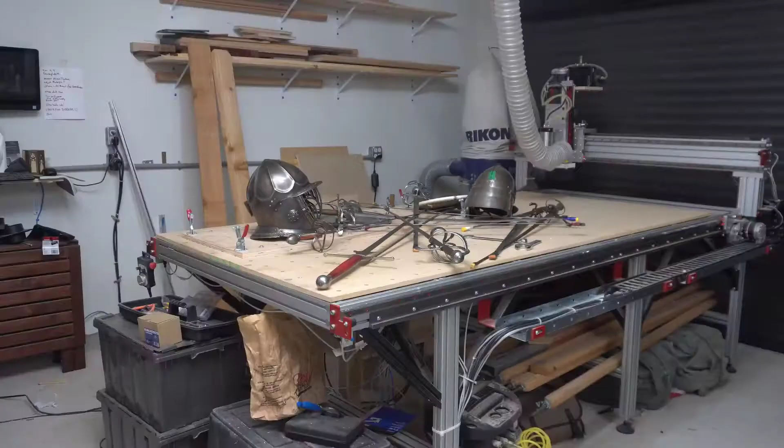Okay. Swords are not supposed to be in a CNC machine. So I guess we're making a sword rack.

We're going to try something new today on Hands on CNC. I'm going to give you guys an agenda with time codes, so feel free to jump to the part you're interested in. That being said, we're also going to cover kind of the whole workflow from idea to thing. So if you're new to CNC machines and digital fabrication, watch the whole video. If you have friends that are new and you're trying to explain things, great intro video of this is what CNCs do.

So we're going to cover, obviously, the design itself in Fusion 360. We're going to jump into Fusion 360's CAM area. We'll talk about how we made the cut operation choices we made. Then we're going to do the construction. You can watch some construction videos. It's ubiquitous. They have to be construction videos. And then we'll kind of review the results and talk over what we learned.

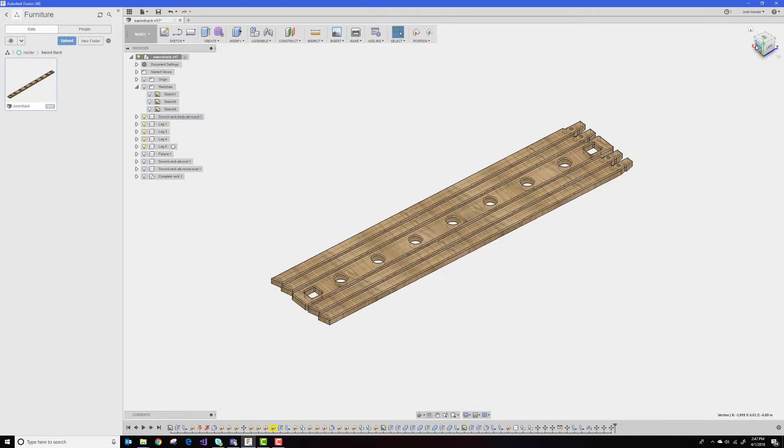All right, so here's our sword rack, kind of starting from the end design-wise, because I've already made these. I make these, so backwards maybe. But the reason we use a CNC to make this, it looks like a very simple part. It really is a simple part. There is some interesting geometry up here. This geometry is a little interesting, and it would be a little difficult to do by hand. Not impossible, but that's what robots are great at.

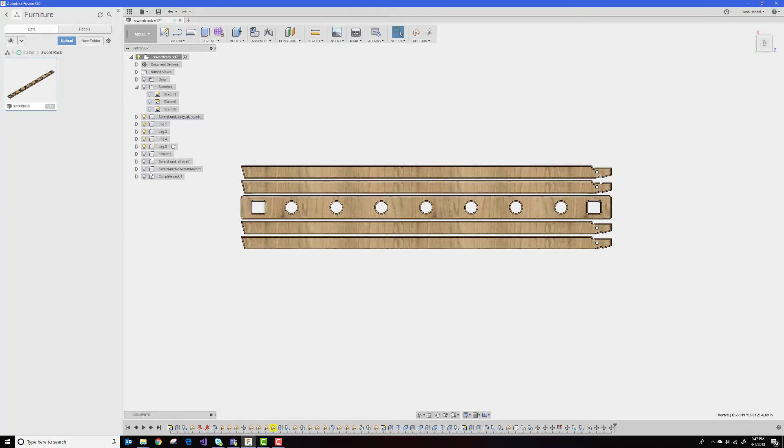So what CNC machines are great at is doing a little bit of complicated geometry and then making it absolutely consistent. So there's some geometry up here that allows you to lock the legs around the leg holes, kind of like a vise. I'm going to show you what that looks like in a second. And then there's matching geometry at the bottom, so when the legs are open, they're flat. And so the idea is you take two legs, you flip one backwards to the other. So you really only have two parts to this whole thing. You have the body and you have the leg.

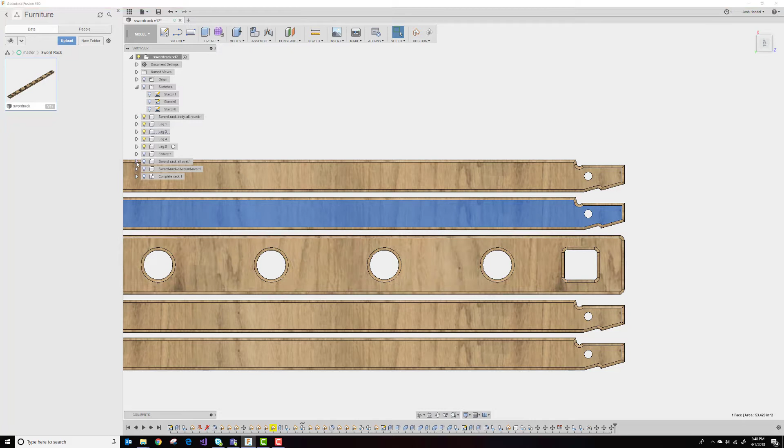Now, I have a couple versions of the body. I happen to. You don't have to have. It's just my own thing that I have a couple versions of bodies, an all oval. There's an all circle, and then I have a circle oval. But the legs don't change. It's a nice thing. It's one leg design. Get the math right, and then it works out.

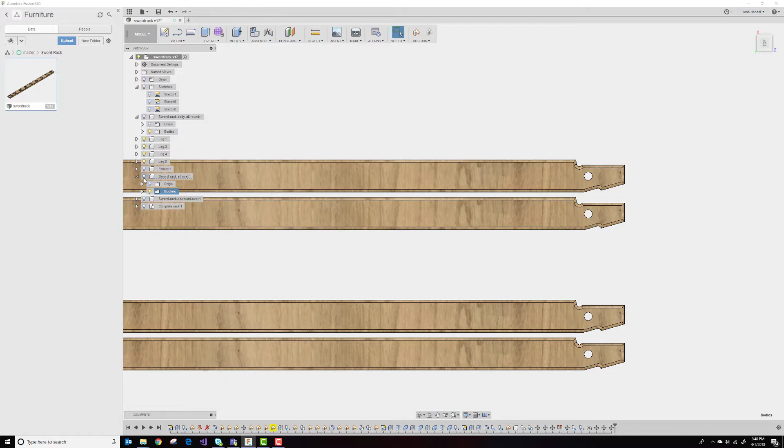So when I say get the math right, what does that look like? Well, I kind of put together a little operating example here so we can talk about that. So let's go back to home. Let's flip around to where my sample is. And so you can change our view a little bit, maybe make this a little more visible. There we go. So you can kind of see this leg fits through here and then clamps.

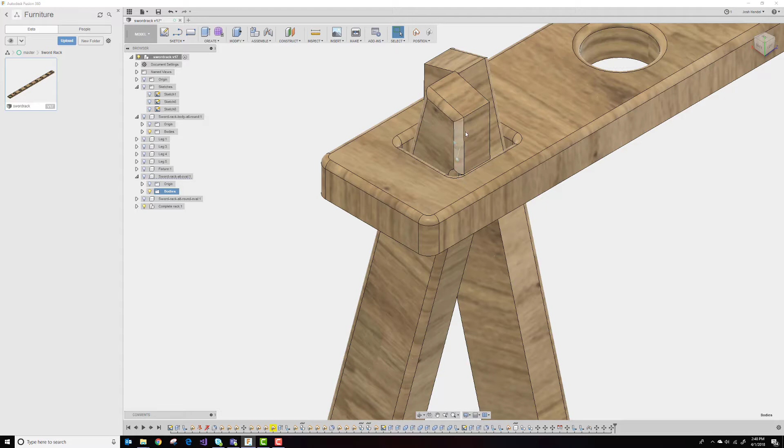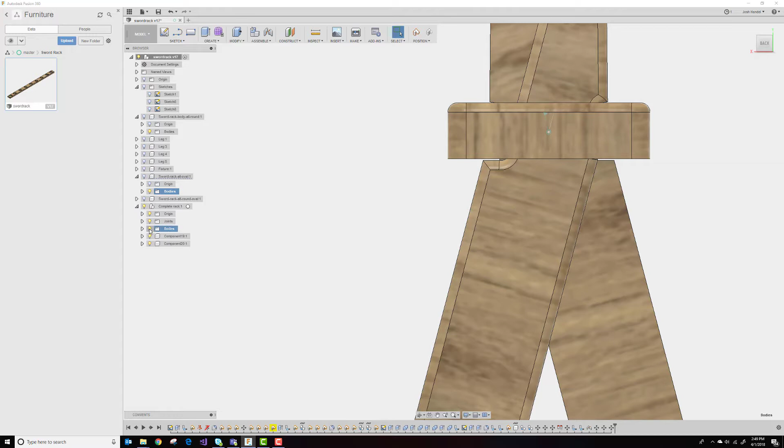And if we go to this view here, you can kind of get an idea how the leg goes through, and it opens up, and there's a little ledge at the bottom, and then that little radius comes over. And if I hide the body, you can see what we essentially get are like little pairs of pliers squishing down and holding the sword rack itself in place. So we give the sword rack a ledge to sit on, and then we give it a little squeeze to push it down into that ledge.

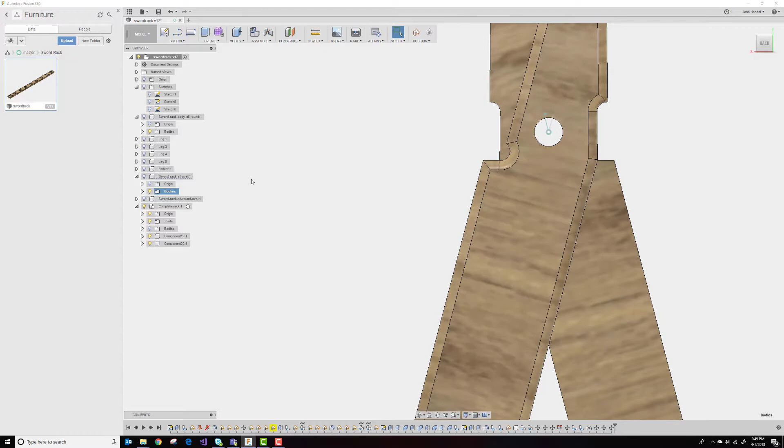And the more this leg pushes down onto this leg's ledge, the more this leg pivots and pushes down in reverse. So you get a clamping action. It's there and it's clamping. And if we operate this joint or drive it, when it's closed up, it's a nice simple piece of material. It's actually bigger down here. It's bigger than the hole.

So it'll slide through, and as it slides through, it'll actually start to force this open, and then it'll clamp in place. It'll get to a point where it can't go any further. It'll clamp into place, and it'll actually kind of firm up and be a nice rigid support. So that's a little bit of fiddly geometry that we did. So the sword rack originated from one friend showed another friend.

So shout out to, in the SCA, Master Aaron Harper, who came up with the first design of these, and then Master Yago, who came up with his version, and then I kind of took his version. I have a CNC machine. I can do this because he did some very simple tooling, a very easy one. But there were some challenges to hand shaping and some other things. It didn't have this clamping geometry. Couldn't quite firm it up.

So if you're in the SCA, you might know who those guys are. If you're not in the SCA, don't worry about it. They're wonderful individuals, and thank you for their evolution of this to the point we're at. So there we have it. Let's talk about how we got here.

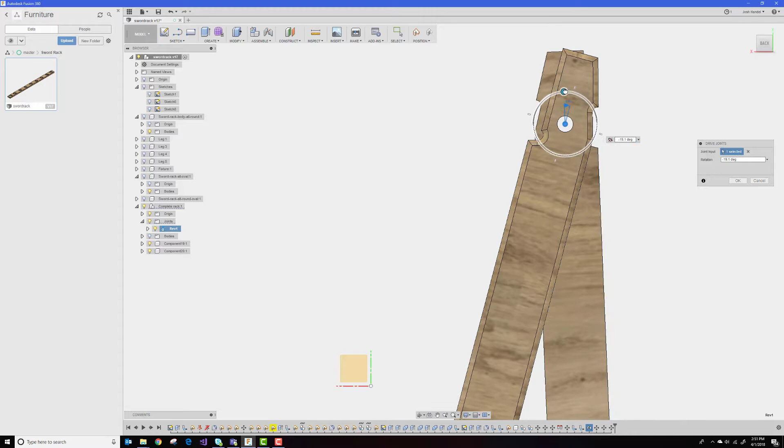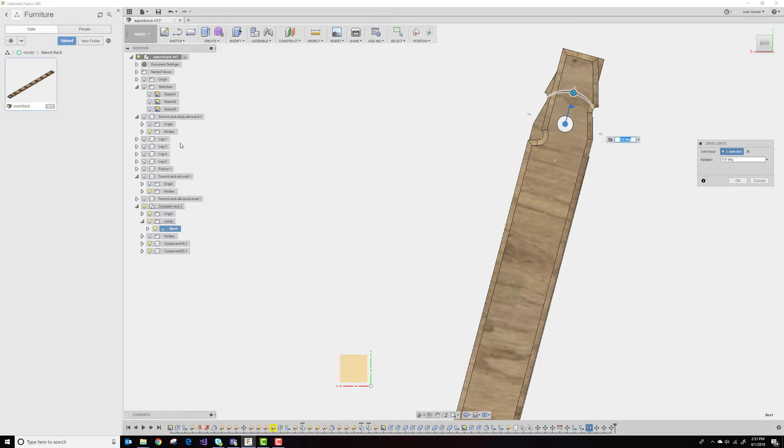If you're new to Fusion 360, if you've never heard of Fusion 360, it's a 3D CAD CAM software, so 3D design and computer-aided machining, so basically instructions. We're going to cover that in a second. Go download it if you haven't. It's not free. It's free for students and hobbyists, and then if you make enough money, you do need to pay for it, although the price is not that bad. So when we work on something like this, we actually work on it first with sketches. And so we're going to look at those sketches real quick.

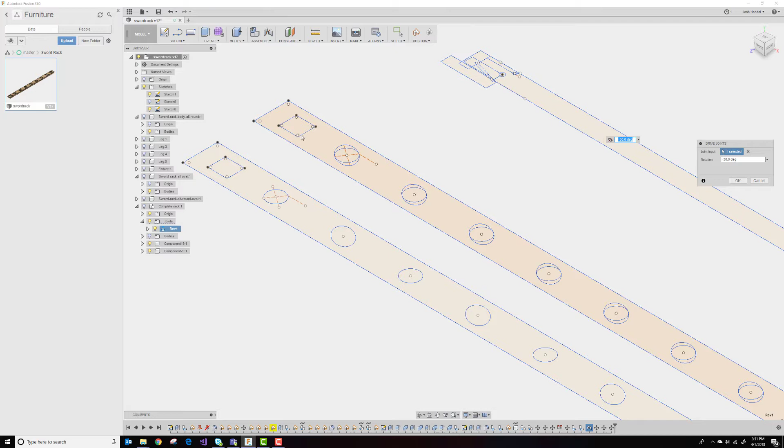So the base is very simple, right? It's a rectangle based on the size of material we want. Some holes in that. This hole is a specific size to match up to what's going on over here, which is the leg. And we just tell Fusion 360 to extrude. So you can imagine, if this was our template, we're just pulling that template into three-dimensional space, and we can make a body out of this.

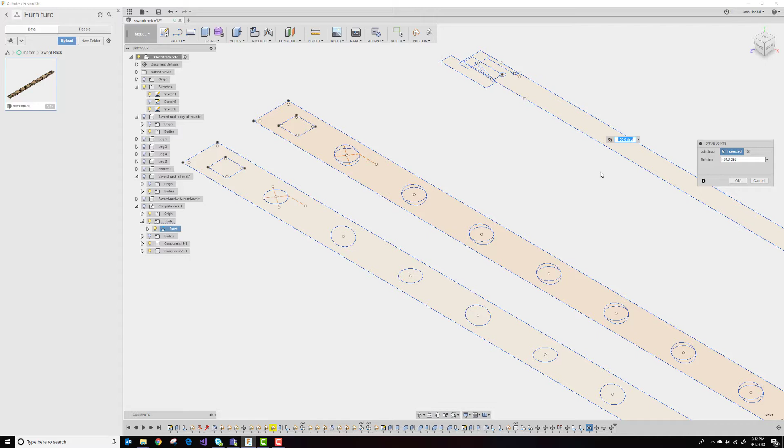In our case, we tell it to be 3/4 of an inch thick. Or if you're unlike the rest of the world and use proper SI units, it's times that by 25.4. Let's rotate that. There we go. All right. So there's your body.

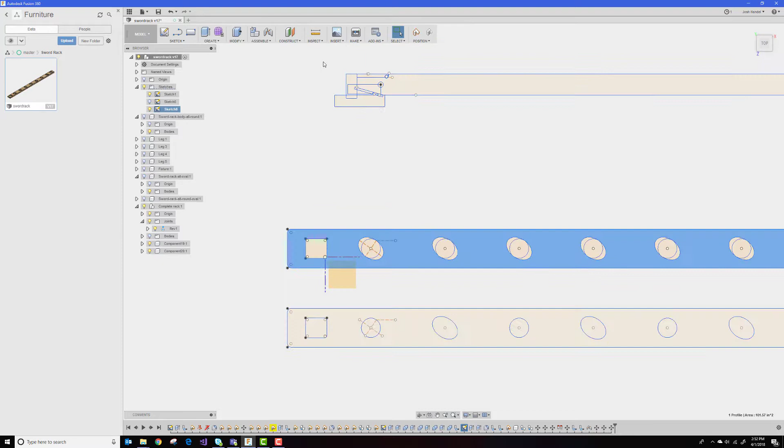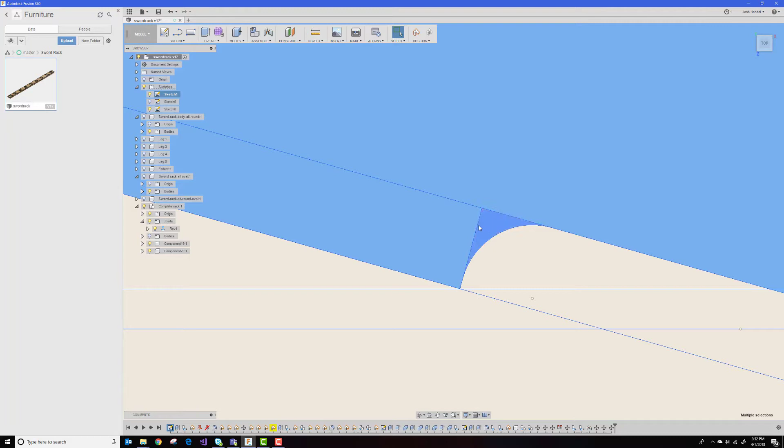Now this fiddly bit over here, all of this makes the foot. Obviously, the part at the bottom makes sense, right? There's that angle. But what's going on up here is we're making a series of subdivisions to allow us to select just the part that we want to be the foot. We wanted this to be a 30-degree angle, so that's 15. So 15 plus 15 because there's two legs gives us 30.

Then we want this line to work with this line, so these are perpendicular here. This line is perpendicular to this line. We have a certain distance we want this to be from this, so our material's 3/4 of an inch thick. So this needs to be a little more than 3/4 of an inch. There's that top radius, that 1/8 inch radius, because we're going to use an 1/8 inch bit to round over the top. So we actually want this to curve and fit. A little bit of extra material to come over that ledge.

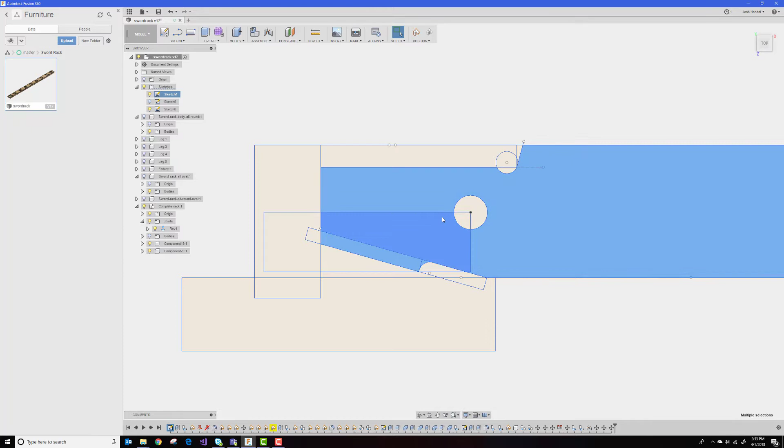And then we want this whole thing to be smaller when it's folded up than the hole that we're going into, which is obviously wider than the space. And so that's to make that narrowing shape. So this is some basic, fiddly work. But once you've done that and you're happy with it, you just extrude it like the body. So very, very simple model to make. And that covers the model. It really is just that easy.

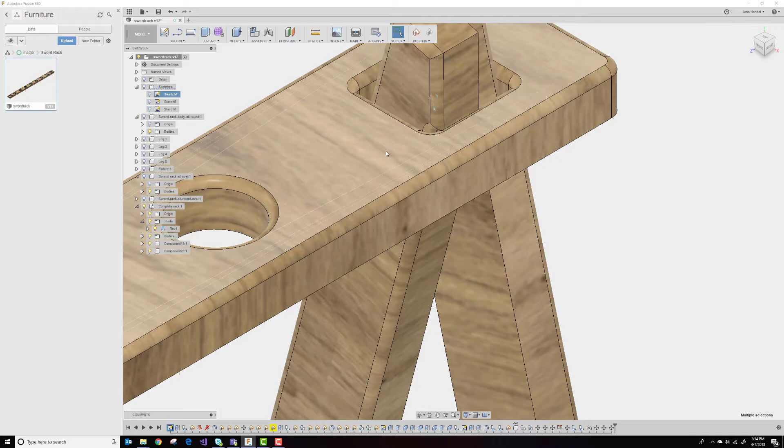And then you get a shape like this, and you put the body on it. You can see again, here's that wrap we're talking about, right? So there it is fitting in and around and clamping down. So once I'm happy with my model, I'm going to make my cutting layout essentially. I'm going to take all my parts and lay them out in a way that I cut them out.

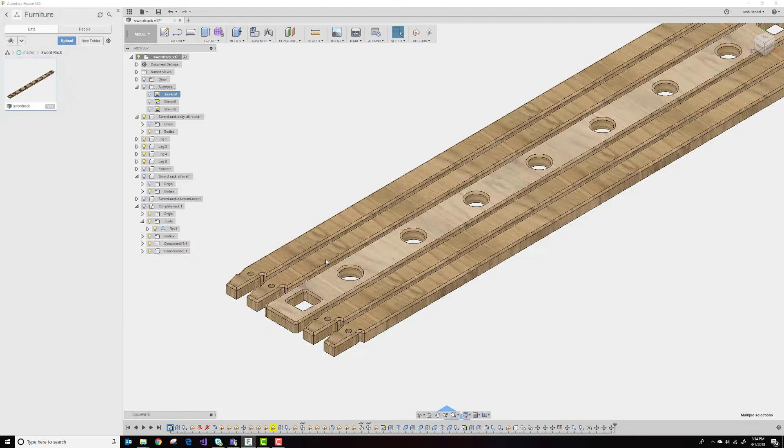This is an interesting thing you have to think about: you have tools, or bits, that you're going to have moving around. So how do you space things to cut? Obviously, if I put these exactly next to each other, what's going to go in between them to do cutting? In this case, it's pretty straightforward. I put a 1/4 inch between all these parts because I'm using a 1/4 inch bit, so one bit can cut both sides. And then I have a special radiusing bit that I'll use to cut the soft turns. All that we're going to cover in CAM, so let's jump over to CAM.

All right, so here we're on the CAM. CAM, computer-aided machining. So if you're new to this, this is how you tell the CNC machine, essentially the robot, exactly what to do. So we're going to tell it, I want you to take a specific bit, which I'm going to load in it because I don't have an automatic tool changer, and I want you to follow a given path. I want the RPM of the router to be a certain speed, and I want you to go through that path at a certain speed.

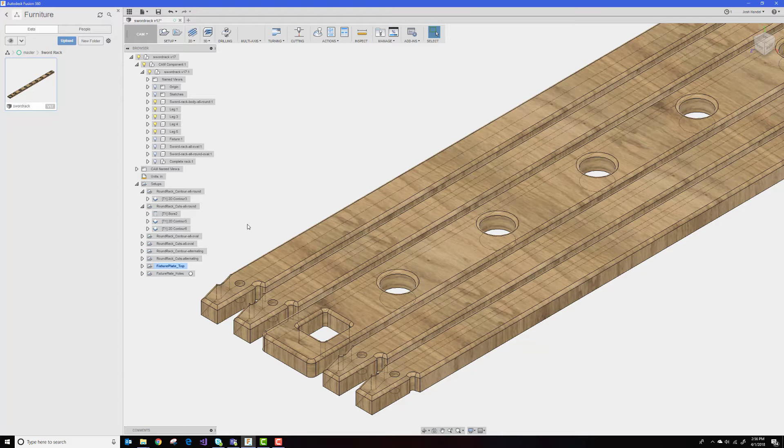So that's called your feed. So oftentimes you hear in CNC world, feeds and speeds. Feeds, how fast is the machine moving through the material? Speeds, how fast is the spindle spinning the bit, which we call the tool. So tool's a bit. Feeds are how fast it moves. Speeds is what's your RPM.

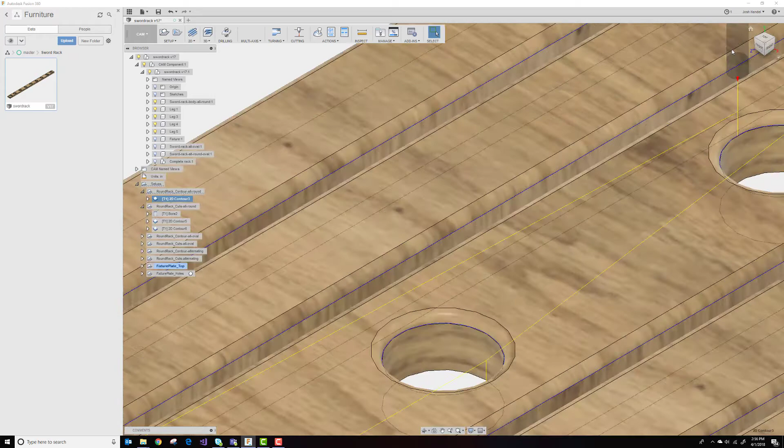In this project, they are very simple. We are radiusing this part, so we're telling it to take the center point of the bit and follow some lines, and we're telling it to follow those lines an eighth of an inch deep, and it's a special bit. You can see here that it's modeled that bit as an eighth inch radiusing bit. So that's a very simple job.

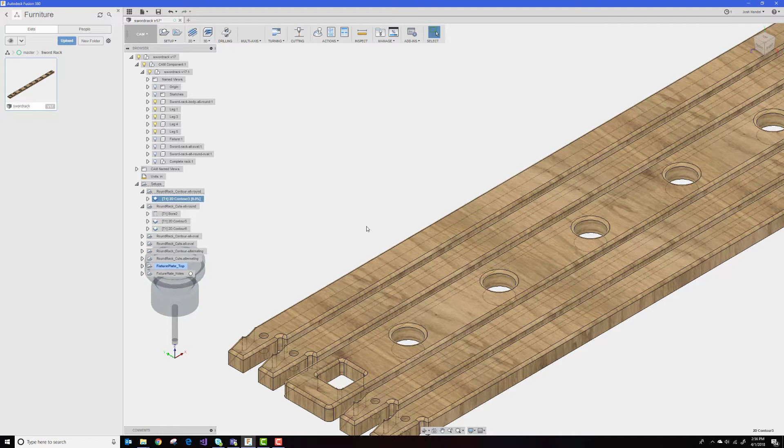If we go edit this and look, it really is a special bit which we've told Fusion 360 about. We want it to run at 20,000 RPM, and we want it to move a fairly slow 52 inches a minute, because it's a fragile, very small bit. It's literally going to a point. And we cut a lot of different materials, so it's kind of a safest path, right? We could be really efficient, but...

So once we've radiused it, then we want to cut out all of our parts. So first step is we're going to do what's called a boring operation. It's a helixing operation. So very first step is we change our bit. You can notice the bit shape changes. And if we look here, we've actually changed our bit to a 1/4 inch bit. Now notice it's not actually a 1/4 inch bit. We've measured the bit, and while we thought we bought a 1/4 inch bit, we actually bought a bit that was a few thousandths smaller.

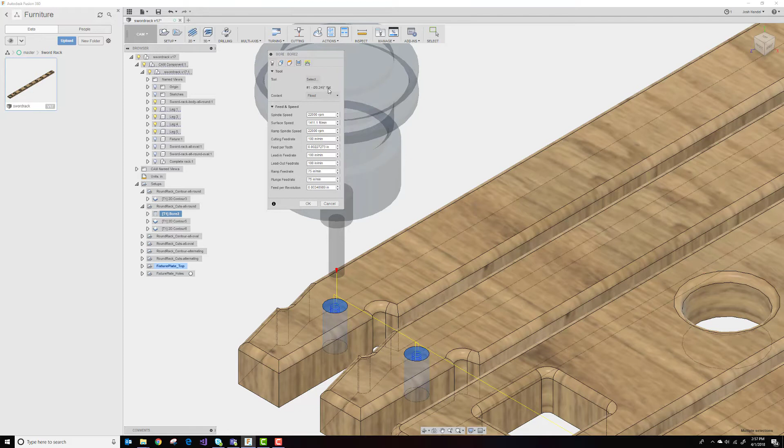And this is important because if I am a few thousandths off, I'm essentially a 100th smaller on all insides and a 100th bigger on all outsides, because if I cut this circle, the CNC machine is going to assume I have a certain thickness of bit. If I tell it it's a 0.25 thickness bit, it's going to move to cut 0.25. It's going to move the bit slightly to the inside because it thinks it's a bigger radius.

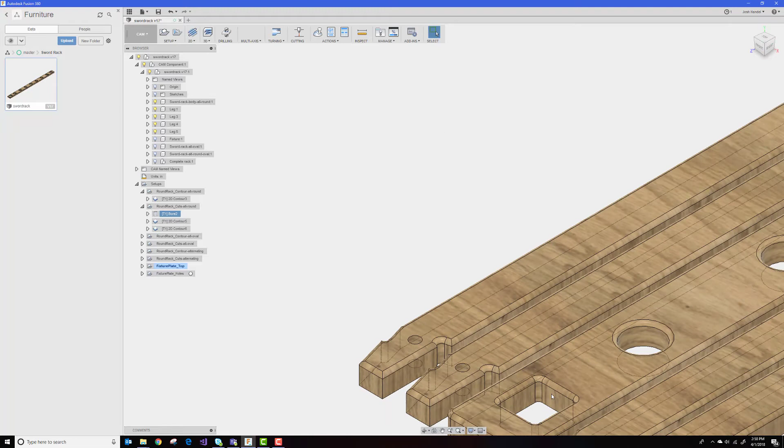So what happens is all of these circles become a 100th of an inch smaller. We're talking about 5 thousandths of an inch difference. It turns into a 100th because you have the problem on both sides, essentially radius, right? So all of our holes become a 100th of an inch smaller than we thought. Now that doesn't make a big difference in these big holes, but in these bores it makes a big difference, and it makes a big difference in these holes.

Now why does it make a difference in these holes? There should be a 100th of an inch grace area. Well, these are a 100th of an inch off, too small. The outside corner has the same problem. The bit's moved slightly, so now the outside is a 100th of an inch too big. The result is the whole part is 2 hundredths of an inch too big.

So we want to know exactly what bit we're using. We want the CNC to know exactly what bit we're using. We're going to save ourselves a ton of time in sanding and fitting parts together. And we're still going to sand and fit parts together, but we're going to save a lot of time. It's not going to be as bad.

So we do the boring operation. Then we do a contour to cut out the insides, and you'll notice there's a little notch here, and we'll do a simulation to show what that is. That's called a tab to keep the part in there. If we cut that out, the remainder stock is going to fly out of it, could cause damage, could get stuck. We don't want to risk that, so we want to keep all the parts. We don't want parts to move until we're done with the project, right?

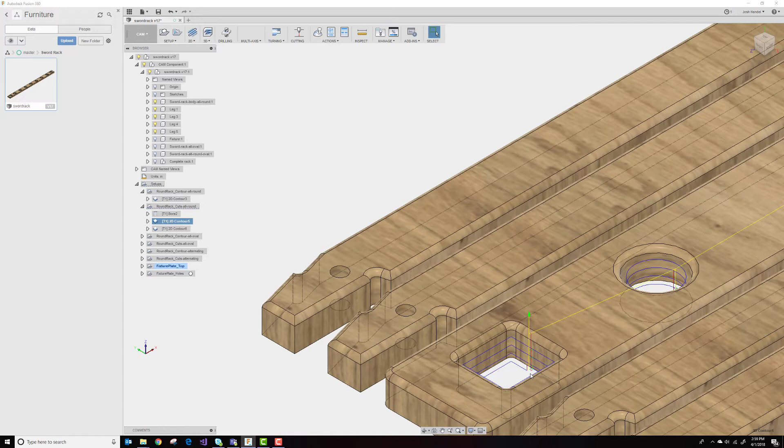And then same thing, we're going to cut to the outside. Now, whenever you do these contours or whatever approach you take to cutting, there's a bunch of different ones here. We're not going to cover them all. There's a lot of different strategies to cutting. In this case, contouring is a very simple one. It's appropriate for a lot of wood projects. We're going to simulate that.

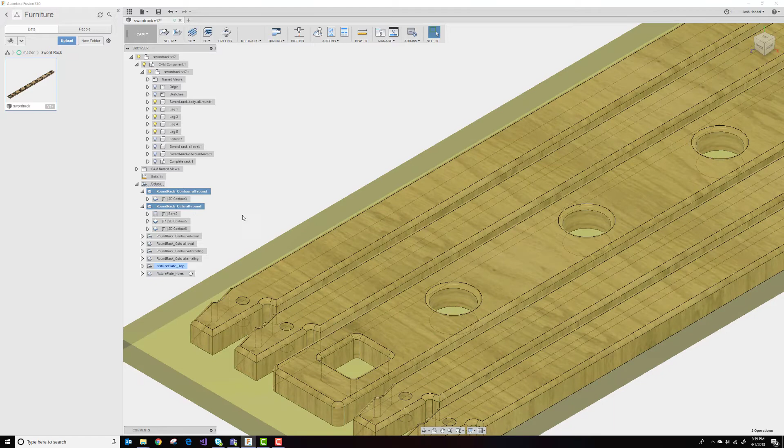So we pick our part, and we go to simulate, and we're going to tell it what we want to simulate, and we're going to hit play, and you can change the speed. I'm going to go real fast, and you can see it's whizzing around, and we're like, did it really do what we want? And what we really want to get to is the very end, really what matters.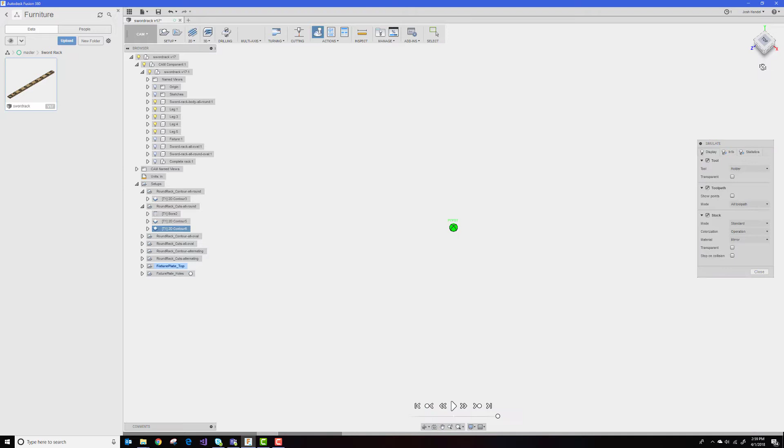And we're going to look at it in our 3D model, and we're going to say, is this what we wanted to make? Because if it's not what we wanted to make, then we need to go back and figure out what went wrong. This looks like what we wanted to make, so we're pretty good with it. We're happy with it. Could be more efficient, but we're going to call it good.

The next step is to export our operations. Now, I'm going to use this term very carefully. There's a lot of things that are called operations. I call an operation anything a human is involved in. So if I have to stop the CNC machine and do something as a human, that's a change in operations.

Personally, I like my operations to be separate files. There are people who put pauses and stops and other things into it. I'm not one of those people. Could be easier, but it's not how I'm going to roll. So I have 2 operations for this project. I round over the edges, then I cut material out.

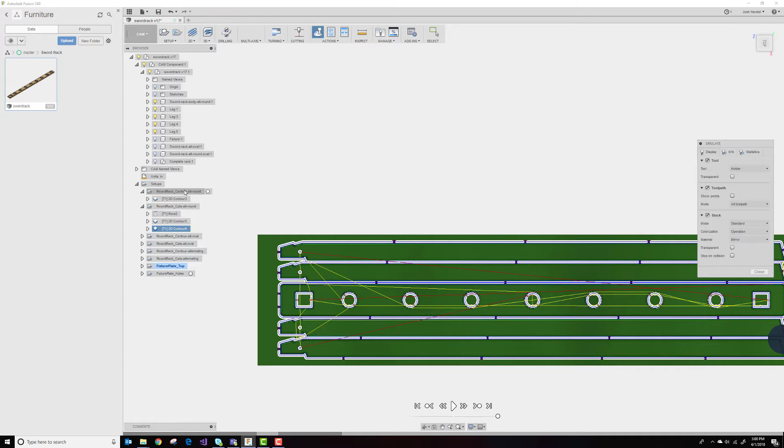When I do that, what I do is I pick the project I care about. I need to close the simulation. I pick the operation I care about, and I post-process. That creates what's called a G-code file. That's the actual instructions for the computer. It's literally a program for your CNC machine to run. And I have 2 of them for this project.

And so we'll zero everything up, set it all up, we'll put the right bit in it, we'll zero the bit correctly, and then we'll run the first operation. When it's complete, we'll change bits, we'll load up the second operation, we'll zero that bit out. Zeroing a bit out means that the CNC machine knows where the bottom of the bit is, because that's important for jobs. Obviously, you have to tell the CNC machine where the part is in 3-dimensional space exactly. So we'll zero the bit out. When we're happy with zeroing the bit out, we'll run the second operation.

When we're done with those 2 things, we will mostly have a sword rack. There's still some sanding and some clipping and some cleaning. So why don't we see what that looks like? We'll go ahead and do the construction phase, and then we'll talk over what we got.